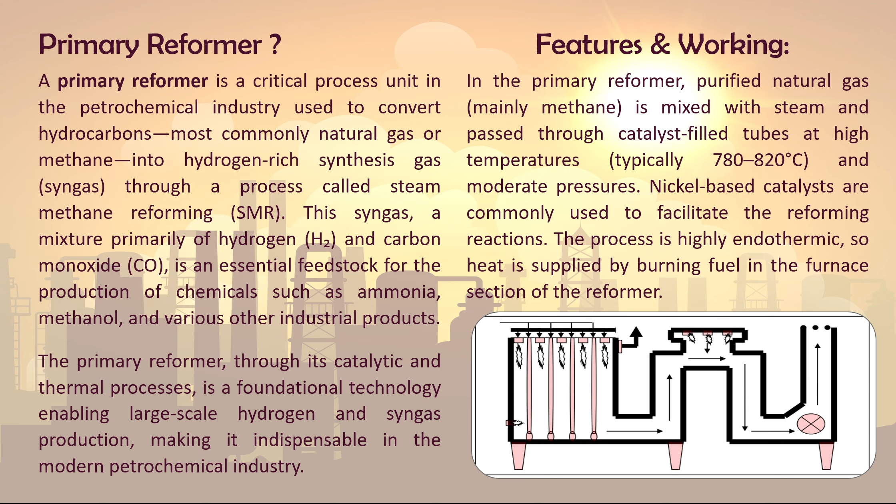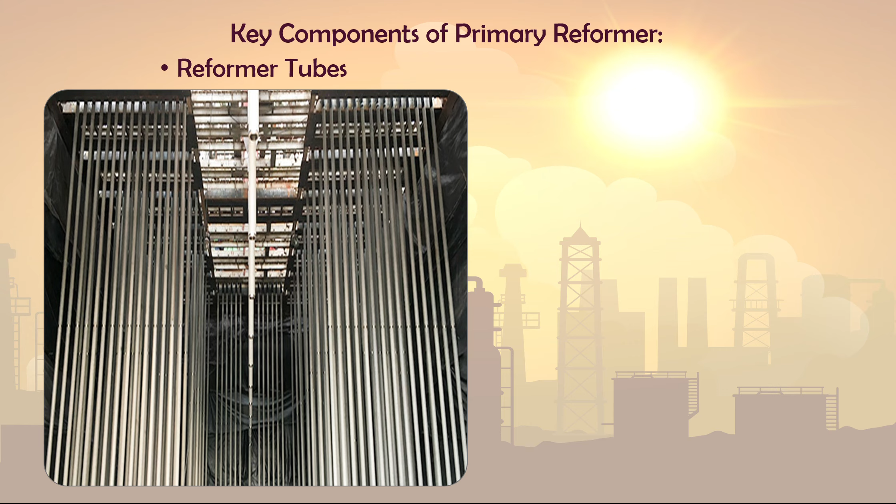Here we will throw some light upon key components of a primary reformer. A primary reformer is a complex unit with several critical components that work together to facilitate the steam methane reforming (SMR) process. The main components include reformer tubes. These are high-alloy tubes filled with catalyst, where the endothermic reforming reactions occur. The tubes are designed to withstand high temperatures and pressures, as well as thermal and mechanical stresses.

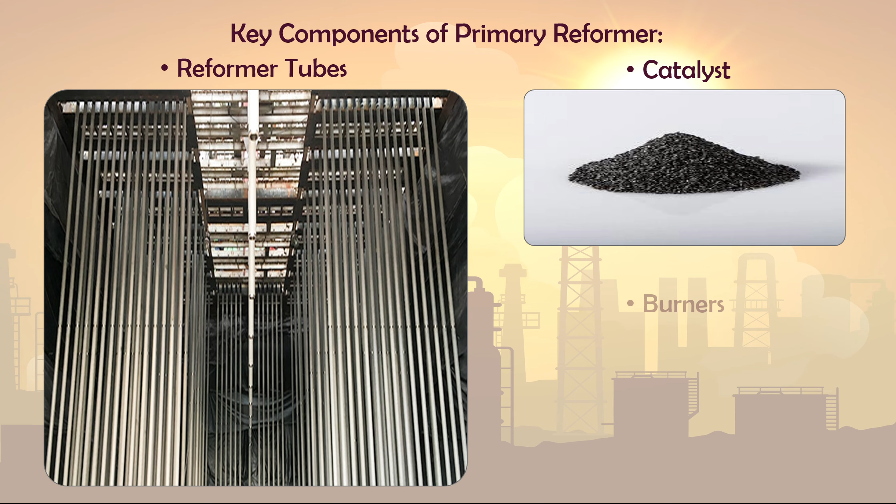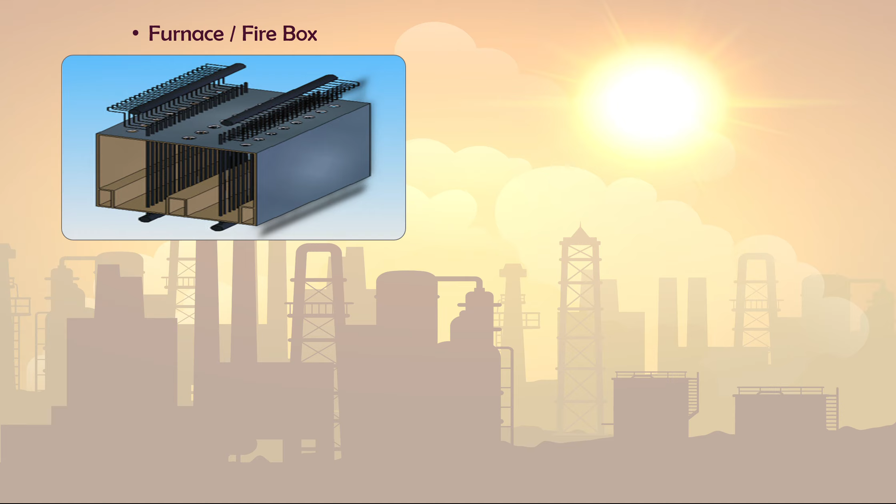Catalyst: typically nickel-based, the catalyst is packed inside the reformer tubes and is essential for promoting the chemical reactions that convert hydrocarbons and steam into syngas. Burners: located in the furnace section, burners supply the necessary heat for the highly endothermic reforming reactions by combusting fuel, usually natural gas. Furnace/firebox: it is the enclosure that houses the reformer tubes and burners, providing the high-temperature environment required for the reactions.

Inlet and outlet systems manage the entry of feedstock, the hydrocarbon and steam mixture, and the exit of product gases, syngas, and are designed to accommodate thermal expansion and prevent excessive mechanical stress. Radiant and convection sections: the radiant section is where the majority of heat is transferred directly to the tubes, while the convection section recovers heat from flue gases to preheat the feed or generate steam.

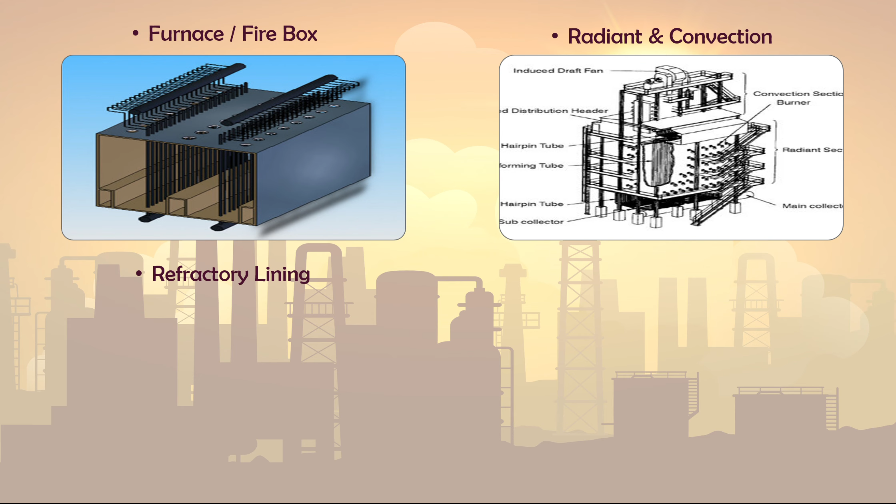Refractory lining: these linings insulate the furnace to minimize heat loss and protect the structure from high temperatures. Each licensor provides a list of approved refractory vendors that have their own respective refractory design linings. Some of the leading refractory vendors for primary reformers are RHI Magnesita, Vesuvius, Morgan Advanced Materials, Calderys, and AGC Plibrico.

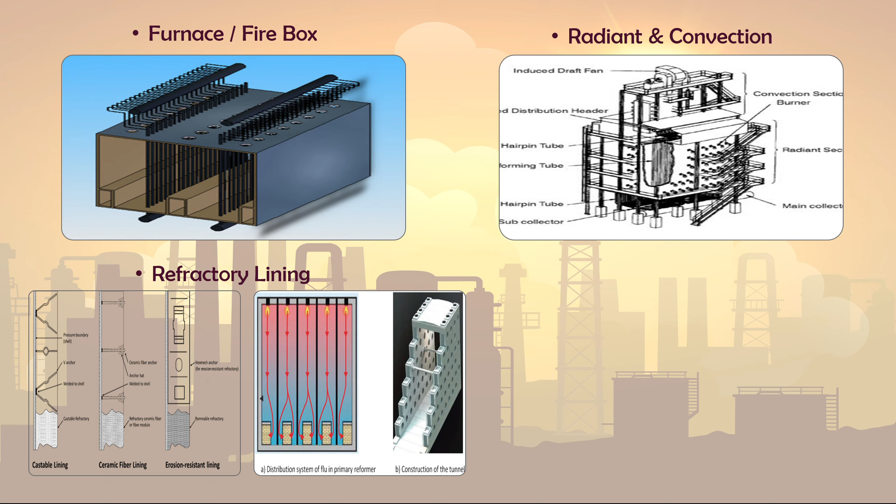Support structures and tube sheets: these provide mechanical support and alignment for the tubes within the furnace. These components are meticulously engineered to ensure efficient heat transfer, optimal reaction conditions, and long-term mechanical integrity under harsh operating environments.

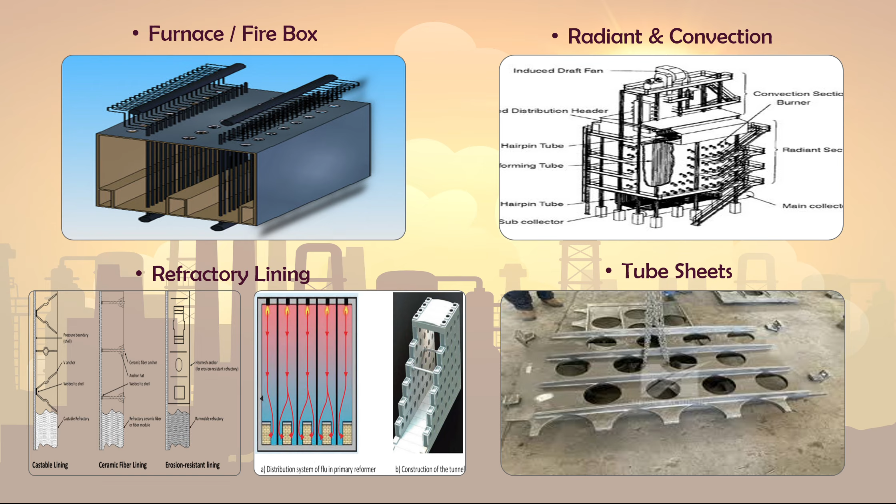The two main types of catalytic reformers used in refineries are semi-regenerative (SR) reformers and continuous catalyst regeneration (CCR) reformers. Both are designed to upgrade naphtha into high-octane reformate and produce hydrogen, but they differ significantly in operation, design, and performance. Semi-regenerative reformers operate at higher pressures to reduce coke formation, but this limits the achievable octane number and yield. The unit must be shut down periodically for catalyst regeneration, which reduces overall availability and efficiency.

Continuous catalyst regeneration reformers feature a moving bed system where the catalyst is continuously withdrawn, regenerated in a separate regenerator, and returned to the reactor. This allows for lower operating pressures, higher severity operation, and greater yields of both reformate and hydrogen. CCR reformers can run for years without shutdown, making them the standard for modern, high-capacity refineries.

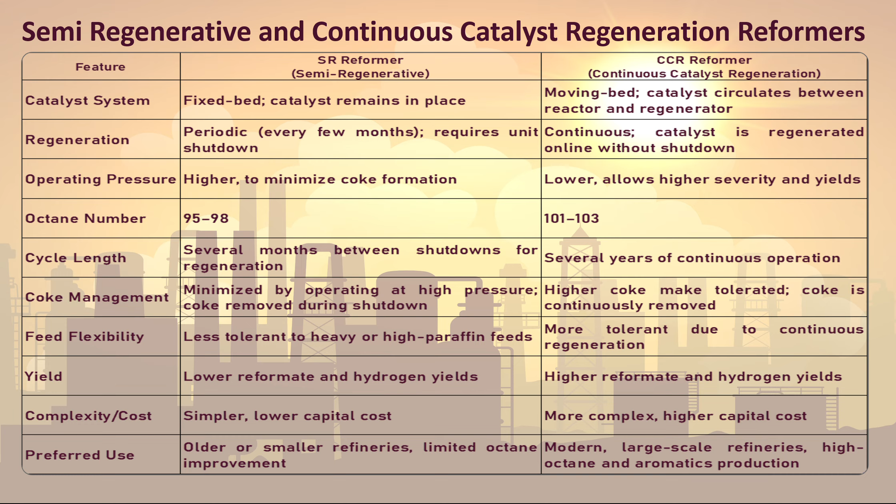Maintenance procedure of a primary reformer. Maintaining a primary reformer is essential to ensure safe, efficient, and reliable operation in the petrochemical industry. The maintenance procedure typically involves a combination of planned shutdown activities, ongoing inspections, cleaning, and careful startup and shutdown protocols.

Furnace and burner inspection. Firstly, inspect burners and the furnace box for wear, damage, and proper flame distribution. Burner tuning and maintenance ensures even heat distribution and prevents hot spots that can damage reformer tubes and ultimately the overall process. Reformer tube inspection and assessment. Regular inspection of reformer tubes for signs of coke buildup, corrosion, cracks, or thinning is performed.

Advanced engineering assessments and remaining life evaluations are done in order to plan replacements or repairs ahead of failures. Cleaning of convection section and tubes. Cleaning of the convection section coils and radiant tubes is performed, which removes fouling and deposits that reduce heat transfer efficiency. This cleaning is often done during turnarounds and can involve mechanical or chemical cleaning methods.

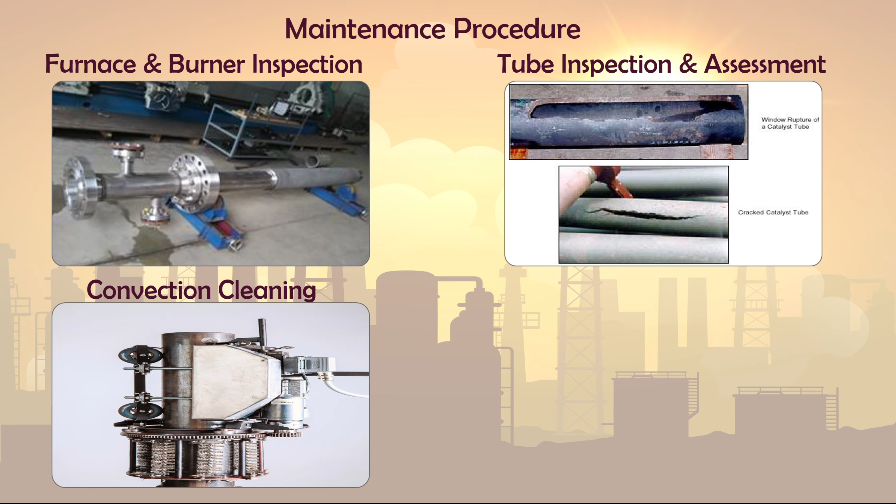Refractory and firebrick maintenance. Inspection of refractory lining, firebricks, and coatings is done to maintain insulation and protect structural integrity from high temperatures. Any damaged section is replaced with new refractory materials. In case of a large overhaul, the entire furnace refractory lining is demolished and new refractory materials are installed as per design specifications.

Let us discuss typical maintenance procedure steps in brief. Preparation. Fuel gas valves are closed and lines are purged with nitrogen. Inert gas circulation is performed to prevent oxidation during shutdown. Inspection and cleaning. Furnace and convection sections are opened. Tubes, burners, refractory, and convection coils are inspected by the process and quality engineers. Fouling deposits from tubes and coils are cleaned by appropriate methods.

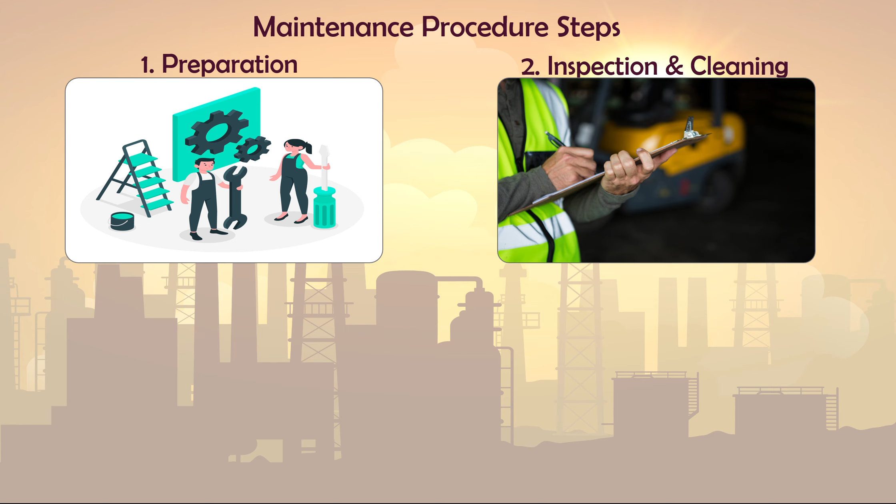Repairs and replacements. Replace damaged tubes or refractory materials as needed, and burner components and control systems are repaired as per their status. Startup. Gradual heating of the furnace is done up to 350 degrees Celsius, then steam is introduced at controlled pressure. Burners are ignited sequentially to ensure even heat distribution. Temperature and pressure are increased to normal operating levels while monitoring closely. This holistic approach, combining inspection, cleaning, controlled operation, and safety protocols, ensures the primary reformer operates efficiently and safely over its service life.

Major technology providers in the field of primary reformer technology, particularly for steam methane reforming, SMR, and autothermal reforming, ATR, include KBR. The KBR primary reformer is a key component in KBR's ammonia and hydrogen production technologies. It is typically a single top-fired steam methane reformer, SMR, designed to convert natural gas and steam into synthesis gas, a mixture of hydrogen, carbon monoxide, and carbon dioxide, under controlled conditions. KBR's primary reformer design is notable for being scalable without size limitations, unlike competing technologies that use an oxygen-fired autothermal reformer, ATR, which requires an air separation unit, ASU, and adds complexity and cost.